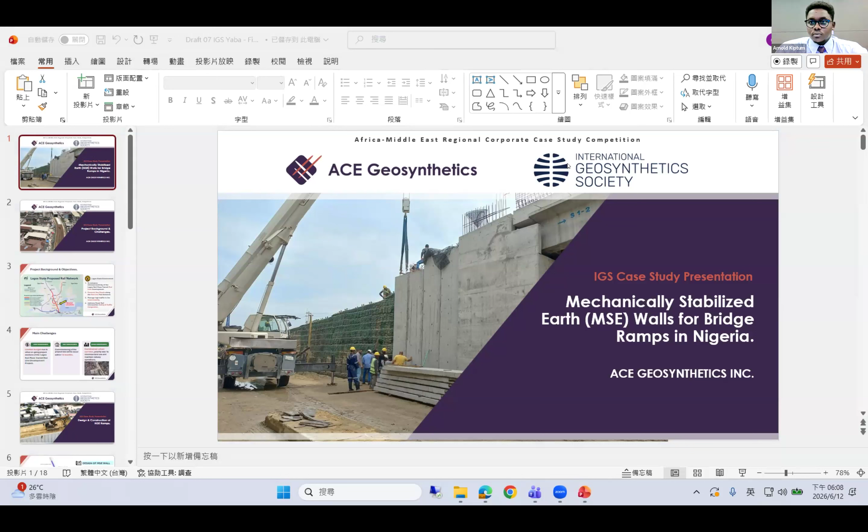Okay, so let's begin with the presentation. To the presenters and to the audience members, thank you so much for making the time to attend this presentation, and the organizers for arranging the presentation. So I'll begin to explain this case study. It was carried out in Lagos, Nigeria, titled 'Mechanically Stabilized Earth Walls for Bridge Ramps in Nigeria.'

So let's begin with the project background, where we see the history of the project as well as the challenges faced in terms of executing the project, as well as the inception phase of the project. As background, this project was initiated by the Lagos State government, mainly to enhance the interconnectivity of the Lagos Rail Mass Transit Red Line development. This project particularly took place in Yaba, as you can see on the screen.

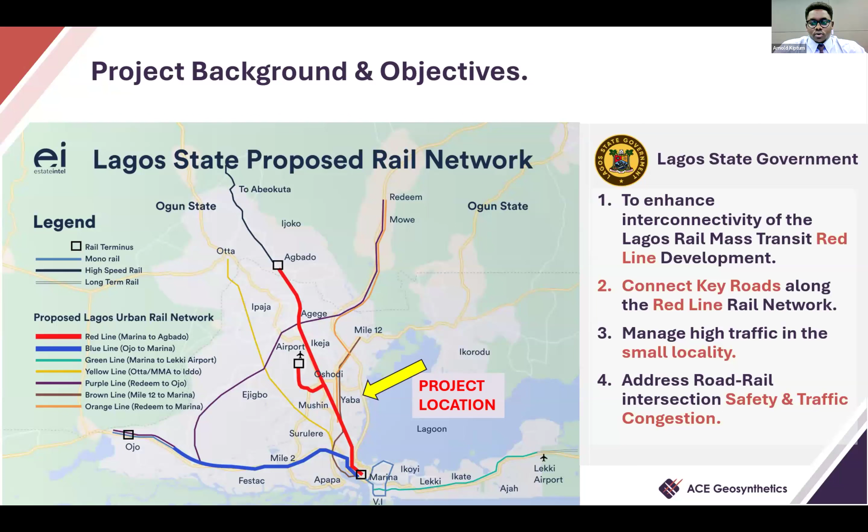The red line you can see in the picture is a railway network around the Lagos area. Other key objectives of this project were mainly to connect the key roads along the red line network, manage high traffic within this location, as well as address the safety and traffic congestion around the points where the rail and road intersect within the project sections.

In terms of the main challenges of the project, we have three main problems: cost constraints, time constraints, as well as space constraints.

There was a limited budget, mainly due to the ongoing project, other sections within the Lagos Rail Mass Transit Red Line Development Project. So a budget had to be contained properly in order to ensure that the overall development was successful. In terms of time constraints, the commissioning of the project was to happen within 10 months due to election cycles, and this commonly affects projects within the region.

And lastly, in terms of the space constraints, there was a huge priority in terms of minimizing the amount of land that was used for the project, as well as to allow for rail operations to continue within the area. As you can see in the picture on the right-hand side, the area is quite dense, and therefore this was one of the constraints that we had for this project.

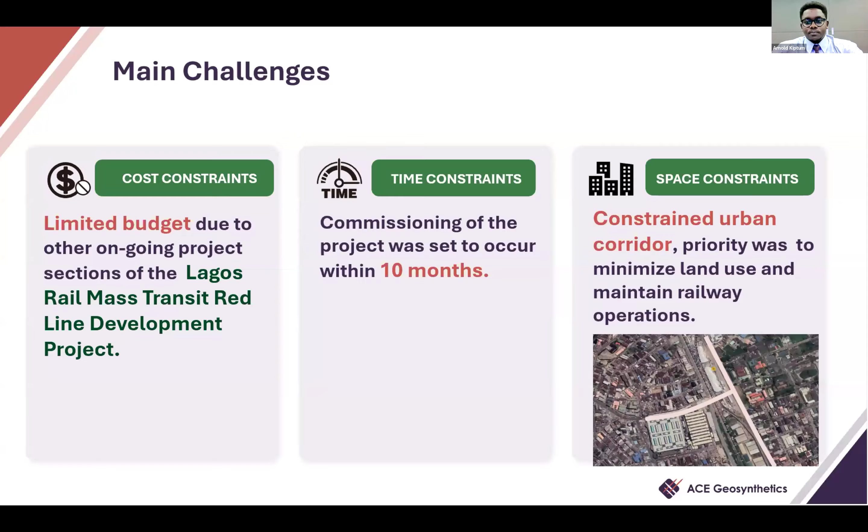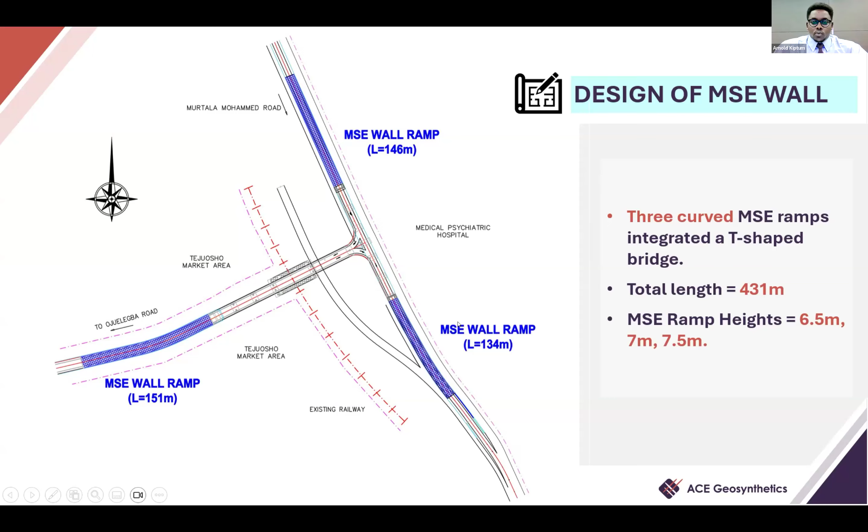So looking at design and construction of the ramps. This picture on the screen shows an overview of the project. Note the railway line in red color passing under the bridge, as well as the three bridge ramps at either side. We do have one, the longest one, spanning 151 meters, connecting the Ojuelegba Road. Then we have two along the Murtala Mohammed Road, which span 146 meters and 134 meters. These bridge ramps went to a maximum height of 7.5 meters, as listed on the screen.

Looking at the section of the wall, it had three main components, namely the MSE wall, a unique anchorage system, as well as the precast full height panels. For the MSE wall, it was chosen mainly to save on the construction footprint due to the limited space. There's also a need to mitigate the differential settlement around the site, since there was some loose soil, and also to allow for lower material costs, since cost was a huge part of the project.

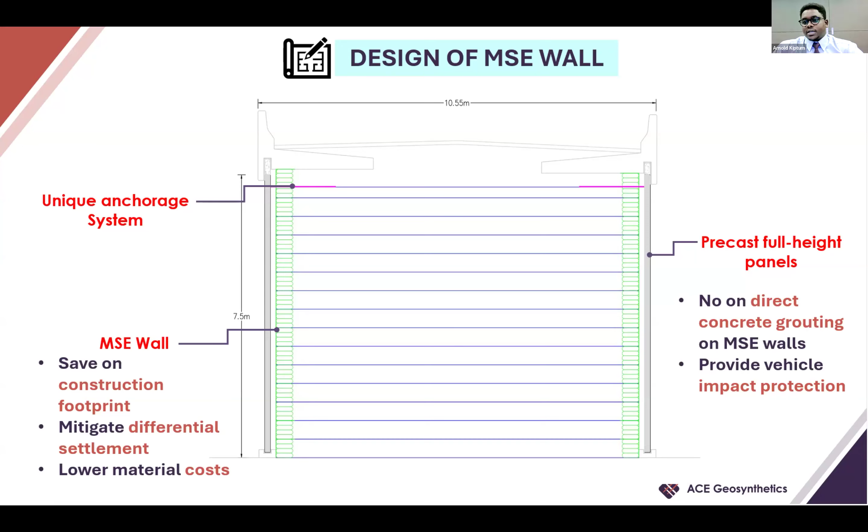Looking at the precast full height panels, this was crucial because through the anchorage system, we were able to ensure that there was no direct concrete grouting into the MSE walls, and also in the event of accidents or incidences within the area, these full height precast panels will be able to allow for impact protection of this structure.

So looking at the benefits and contributions of geosynthetic materials in this project, we have quite a few. Starting with environmental conditions, locally available materials were used for this project. For this case in Lagos, it's sand, and therefore this material is easily obtainable within the site, and this made for a good use for the backfill. Also, since thinner panels were used for the facing and only at the coping section, the use of concrete was really reduced, and this helped also in the cost aspect.

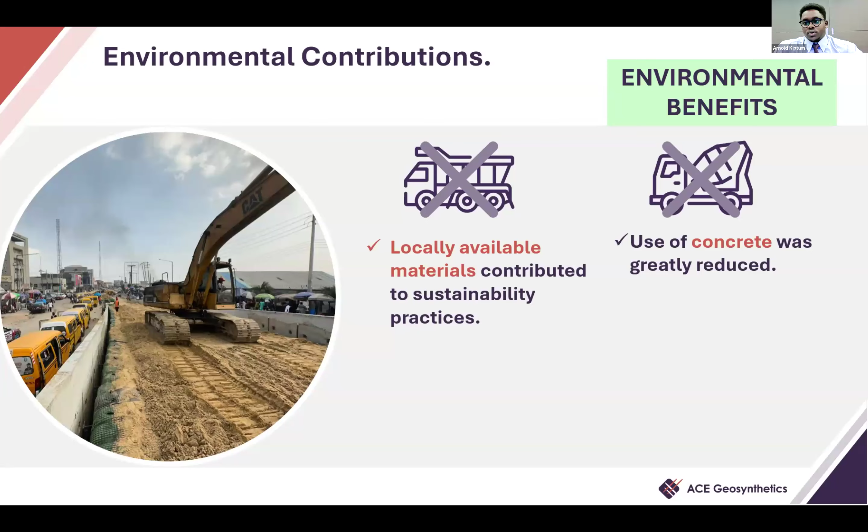Looking at the environmental contributions of the project, if we compare in Nigeria the use of MSE walls, commonly in Lagos, Nigeria, RC bridge pier ramps are the most widely implemented structure for quite a long time. Therefore, we were able to compare that by using the precast facing ramps, we were able to provide carbon emission savings of 74% compared to these typically used RC bridge pier ramps.

The graph on your left also shows the percentage reduction for the RC bridge pier ramps, the cantilever retaining wall that we also thought would be an option, as well as the CIP facing and the precast facing ramp, only producing emissions of 406 tons of carbon emission. For this analysis, the main criteria was mainly around material production and transportation, as shown on the screen.

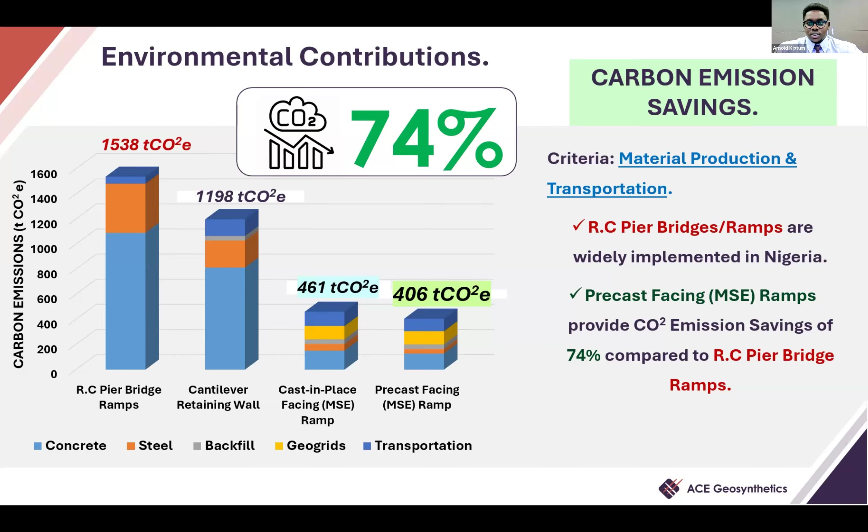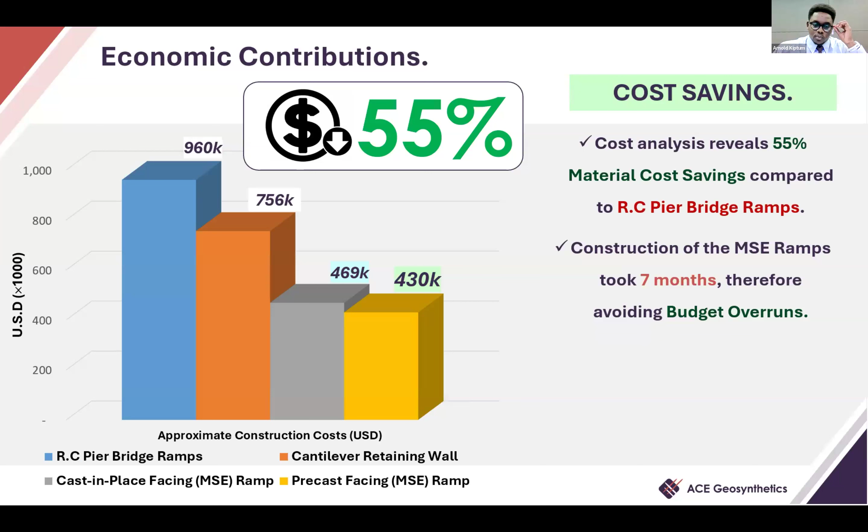Also, in terms of other economic contributions, because of less concrete use and other materials as well, we were able to estimate material savings of 55% as compared to RC bridge pier ramps. And because the project only took 7 months, this provided also additional cost savings by avoiding project overruns that are common with most projects within the region.

In terms of construction efficiency, the MSE ramps also allowed for construction to take place in a limited amount of space. In the previous slides, we were able to see how dense the area was. Also, when you look at maintenance, because MSE structures also allow for low intensity and low frequency of maintenance, this helps to reduce the long-term costs of spending in maintaining infrastructure facilities, particularly in the public sector, or public use.

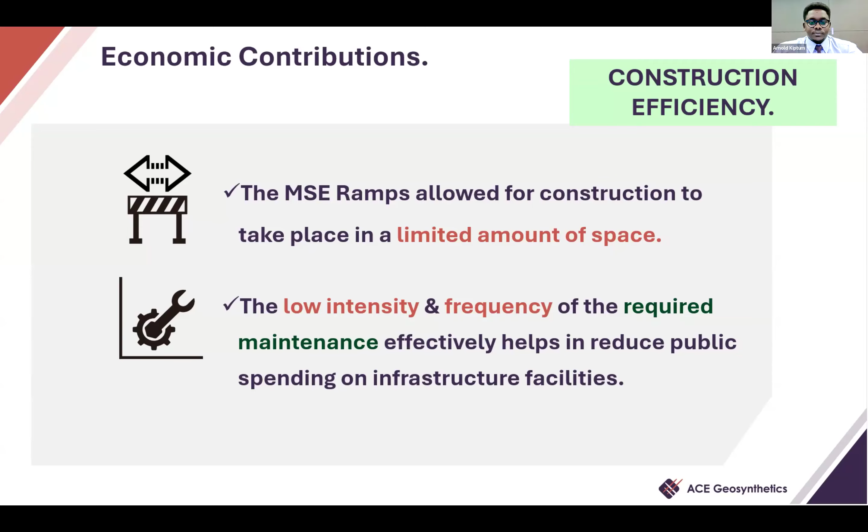So as we wind down to the conclusion, we have a video summary of the project to help you appreciate the construction phase of the project, as well as understand the impact that this project was able to make to the society within the area. So hope you enjoy.

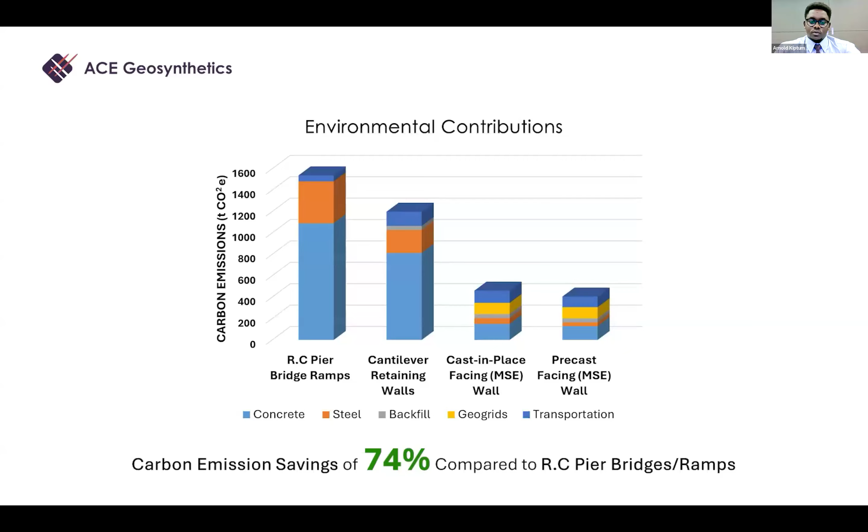So other than that, thank you to the organizers and to the audience members for having listened to this presentation. So thank you, and I would like to welcome any questions or comments from the panelists. Thank you so much.

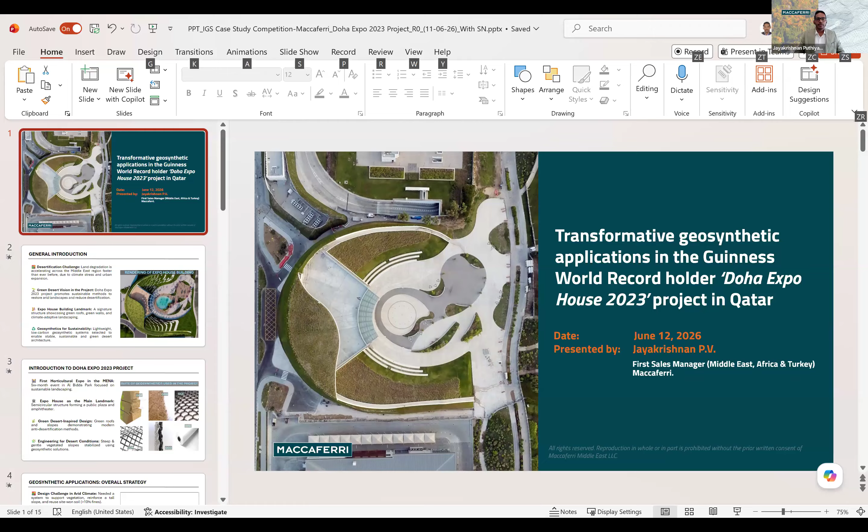Good morning, good afternoon, and good evening to all of you tuning in from different parts of the world. Ladies and gentlemen, it is my pleasure to present the transformative geosynthetic applications in the Guinness World Record Holder Doha Expo 2023 project in Qatar. When I say this, I truly mean the way in which geosynthetic solutions played a transformative role in delivering the project's green desert vision.

Let me take you through the general background of the challenges associated with projects like this in the Middle East, and how geosynthetics can contribute to solving them to some extent. The Middle East faces the severest challenge of desertification and land degradation due to factors such as climate change, fast development, and a fragile ecosystem already existing.

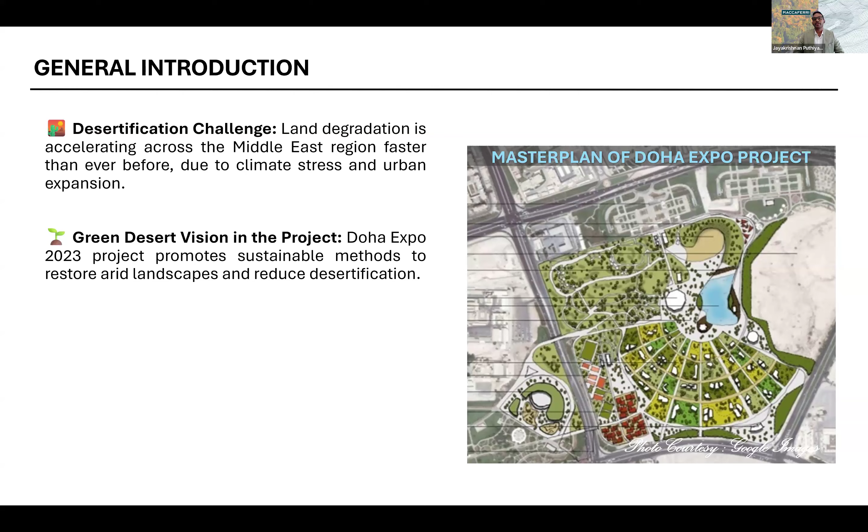The Doha Expo 2023 project, as you can see in the master plan, embraced the theme Green Desert, Better Environment, proving that desert landscapes can be reshaped into sustainable green spaces. The Expo House building is a landmark in the project, showcasing how architecture, landscaping, and sustainability can integrate to perform in harsh desert conditions, highlighted by its green roof and vegetated slopes.

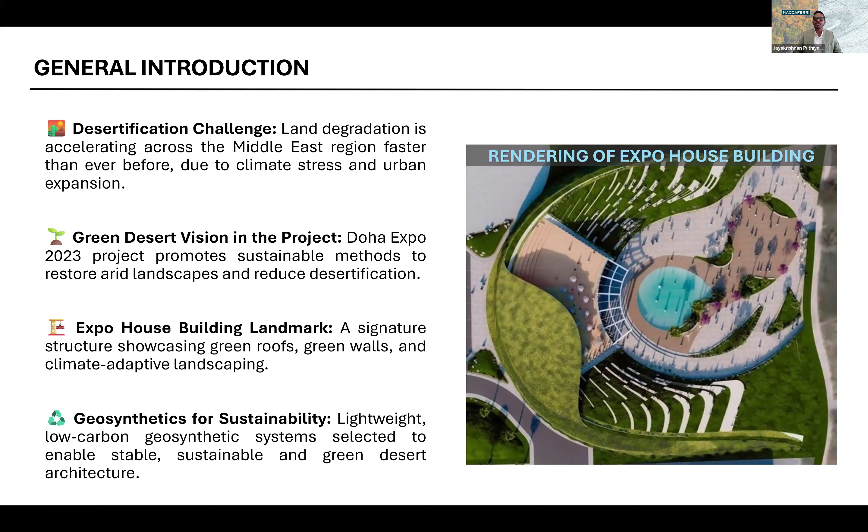Now, what can be the role of geosynthetics in this? They can be used for the creation of steep vegetated slopes, efficient water management, and reduced material use to support sustainable development in arid regions.

Coming to the Doha Expo project itself: this was the first ever horticultural expo in the whole Middle East and North Africa region, and it ran for 6 months in Al Bidda Park in Qatar, all centered on sustainable landscaping in arid climates. The event projected the Expo House building as the main landmark.

The structure has a semicircular shape, opening into a plaza and an amphitheater, fitting perfectly with the green desert theme. Here is the completed project. It uses a green roof and landscaped slopes to show how modern planting systems can actually work in desert conditions—practical, but also a live demonstration of how this can be made possible in arid climate. You can see a striking similarity between the completed structure and the previously shown rendering.

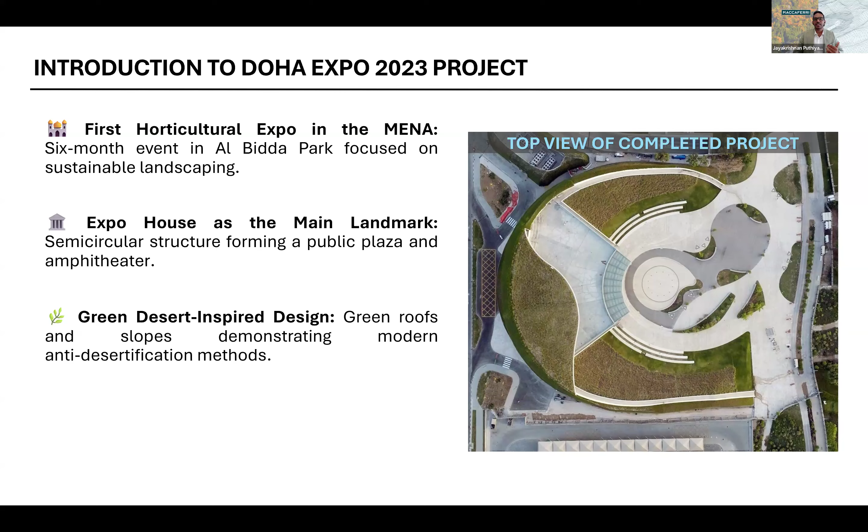Now, the role of geosynthetics: making steep vegetated slopes in Doha is not simple. We need proper soil retention, drainage, and plantation support, and that's exactly where geosynthetics made the architect's idea buildable. Let's look at how geosynthetics were actually used in the project.

Here you can see a cross-section of the earth mound. We have to support vegetation in a very dry climate, reinforce a tall slope, and still reuse the site soil, which is poorly graded dune sand. So the system needed to be strong and environmentally efficient.

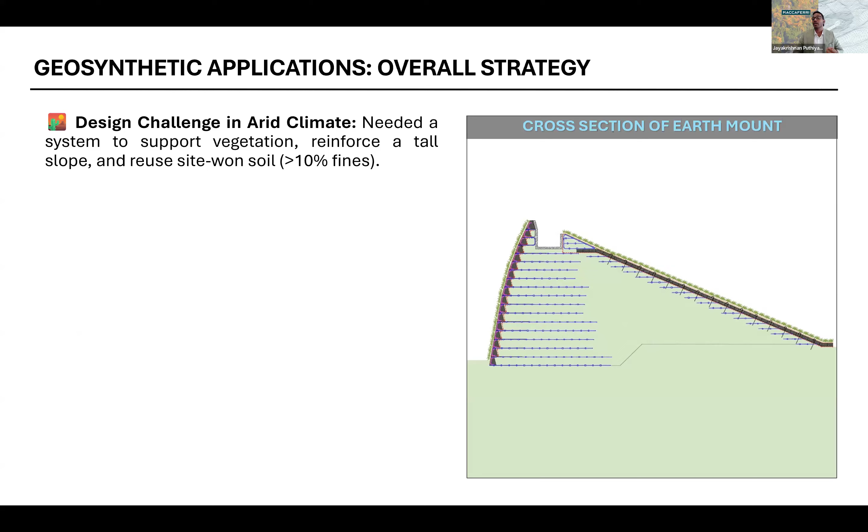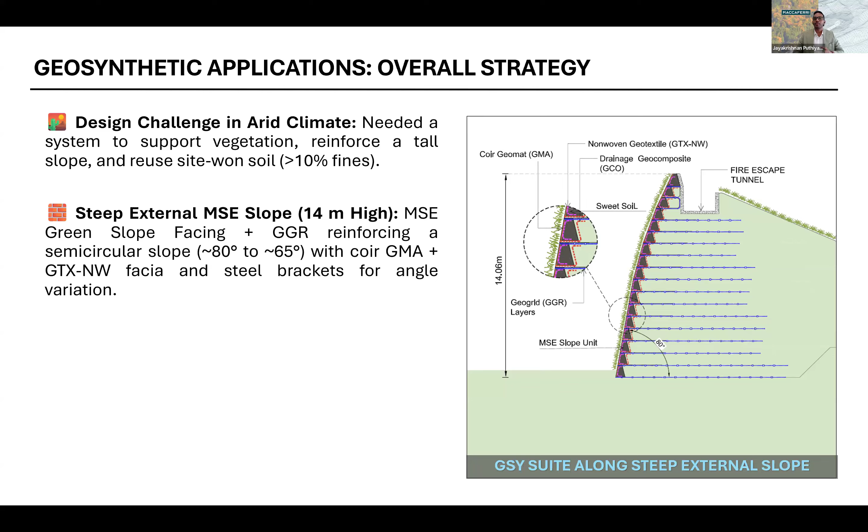The steep external reinforced soil slopes went up to 14 meters in height. We used a combination of MSE green slopes, geogrids, geomats, coir geomat, non-woven geotextile, and steel brackets to manage the changing angles. The inner gentle slope angle varied from 23 to 35 degrees.

Here the visitors are expected to walk, so we used shorter geogrids and geocells for stabilization and soil confinement with the help of J-hooks, and a coir geomat layer was provided all over the top for erosion control.

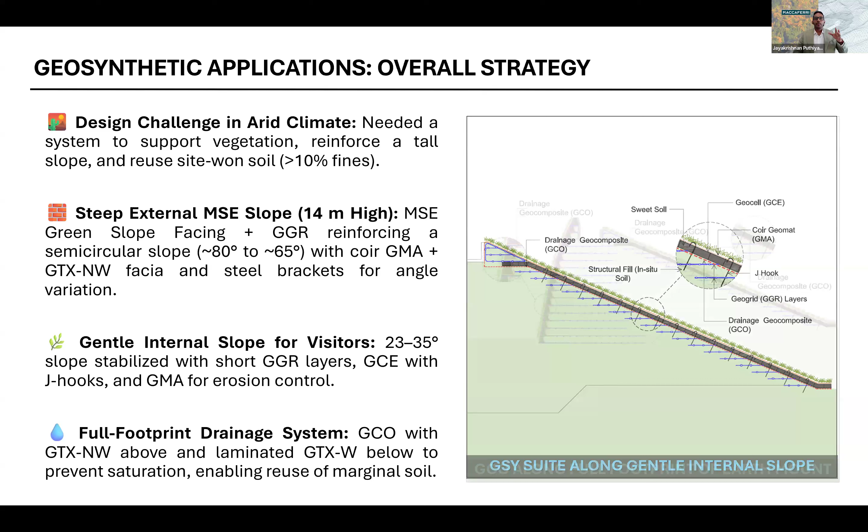Below the entire footprint of the green mound, a layer of drainage geocomposite was used with a geotextile on top and a waterproofing membrane below, which allows recirculation of excess irrigation water while preventing any ingress of water into the structural soil.

This is how we were able to use the dune sand as backfill soil rather than importing engineered fill, because dune sand looks compacted, but when it comes into contact with water it further settles and can cause bulging of the structure. As a result, all the geosynthetics worked together to deliver the geometry, stability, and sustainability the project needed.

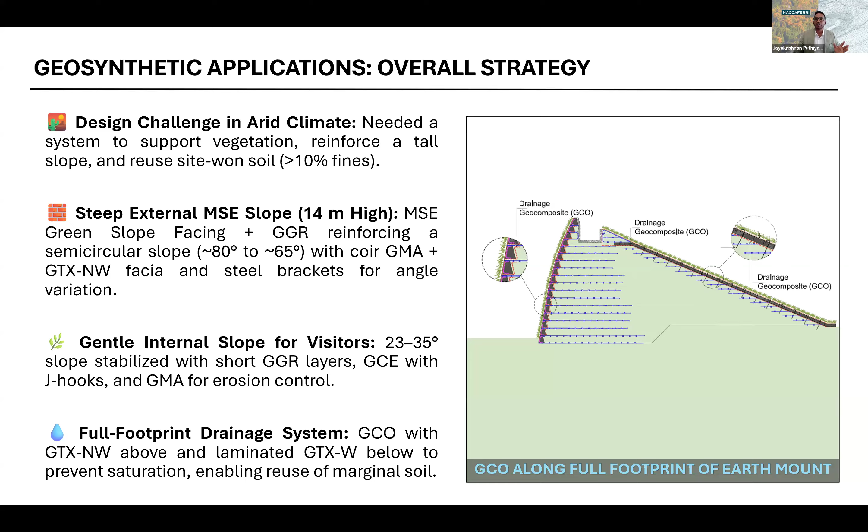Here is a quick summary of the geosynthetics used in the project: geomats, non-woven geotextiles, drainage geocomposites, geocells, and MSE green slopes, serving the functions of erosion control, separation and filtration, drainage and waterproofing, retention of cover soil, and soil reinforcement for steep slopes.

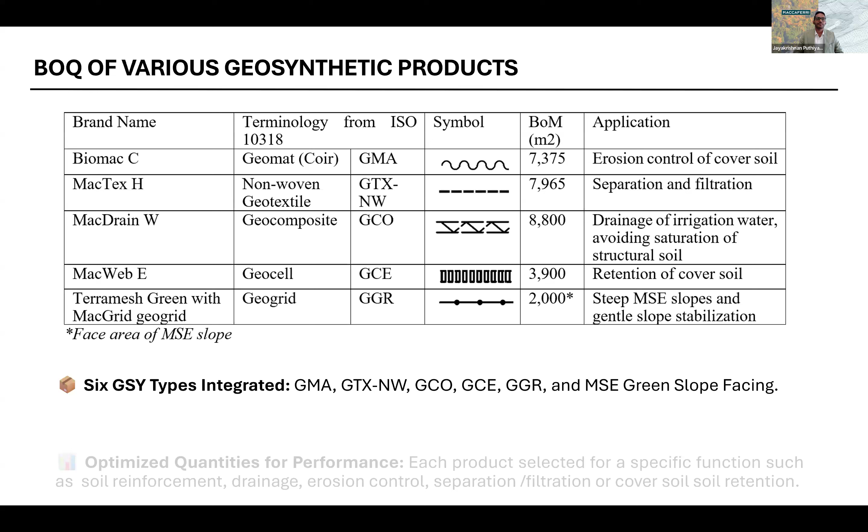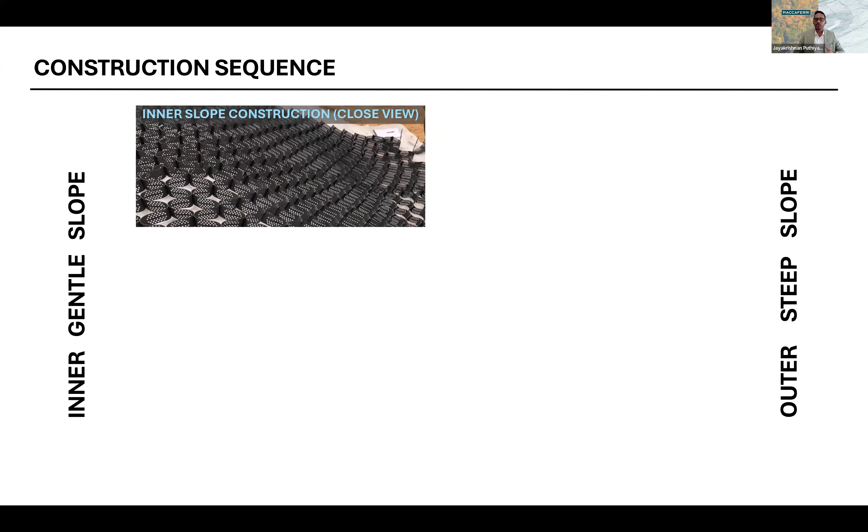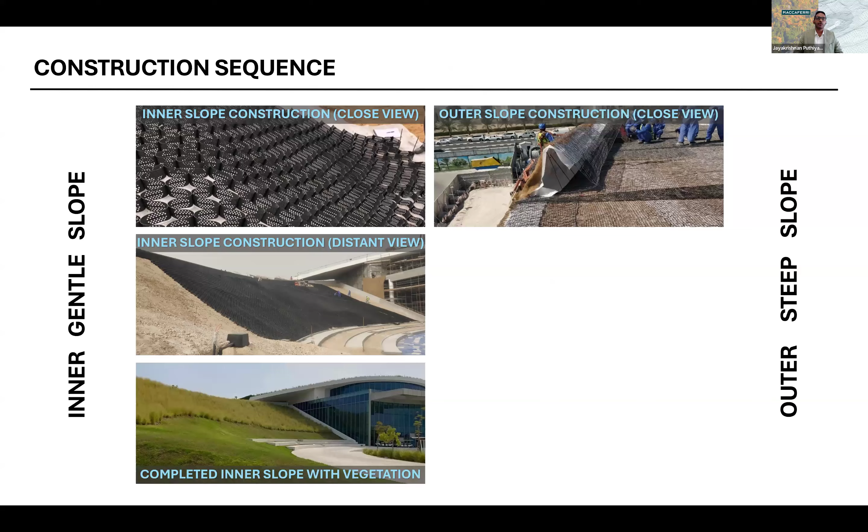Let's have a look at the construction sequence, which is bifurcated into the inner gentle slope and outer steep slope. Here you can see the inner gentle slope. During construction, the geocell was laid, with a close view and a distant view, and here is the completed inner gentle slope with vegetation grown. Here is a close view of the outer steep slope.

During construction, a distant view. And here is the outer steep slope after construction with vegetation grown.

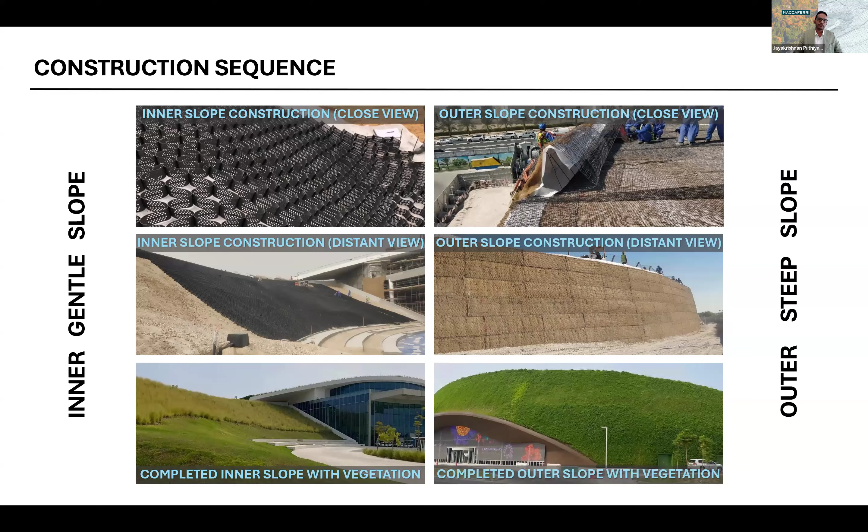This is another distant view from the roadside after complete greenery has happened. And this is another view from the inside, from the amphitheater side, the beautiful Expo House built completed with greeneries.

Now let me walk you through how the project was recognized and the broader impacts we have created. The project was successfully completed in 2023, delivered exactly as planned for the international exhibition, meeting all design, functional, and sustainability expectations. The Expo House quickly became the most photographed and most visited attraction of the 6-month-long horticultural exposition, giving the project exceptional public visibility and recognition.

And here comes the most important thing: the end client, Ashgal, received an official Guinness World title for the largest green roof, having an area of 4,031 square meters, in September 2023, giving the project global recognition and credibility. Needless to say, the geosynthetic-based solutions also contributed, providing stability, drainage efficiency, and vegetation support needed for the green slopes to perform in harsh desert conditions.

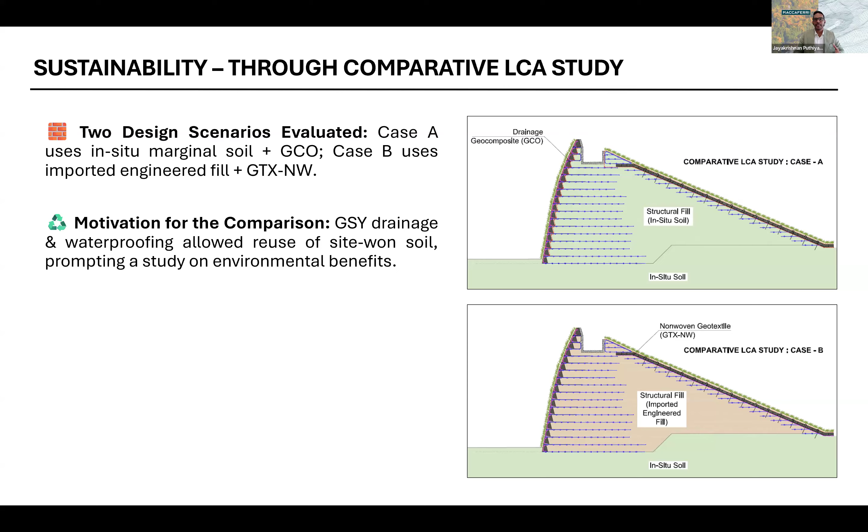Let me take you through the sustainability comparative studies. We studied 2 scenarios, because at one point it was really required for imported fill, and that apprehension of the project stakeholders was solved by the provision of a drainage geocomposite all around. So here we are comparing 2 scenarios: case A with drainage geocomposite and site-won dune sand as the structural fill, and case B with a non-woven geotextile separation layer and imported engineered fill.

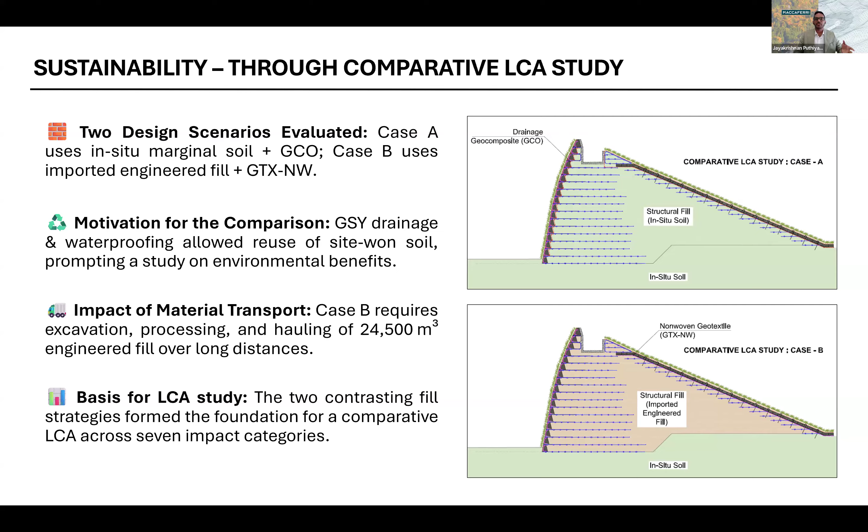In case B, about 24,500 meter cube of engineered fill would need to be mined, processed, and hauled, and that transport alone drives significant emissions and energy use. This formed the basis of the comparative life cycle assessment, comparing these 2 contrasting approaches: reuse versus import. You can see the results with reference to the 7 most important environmental impact categories.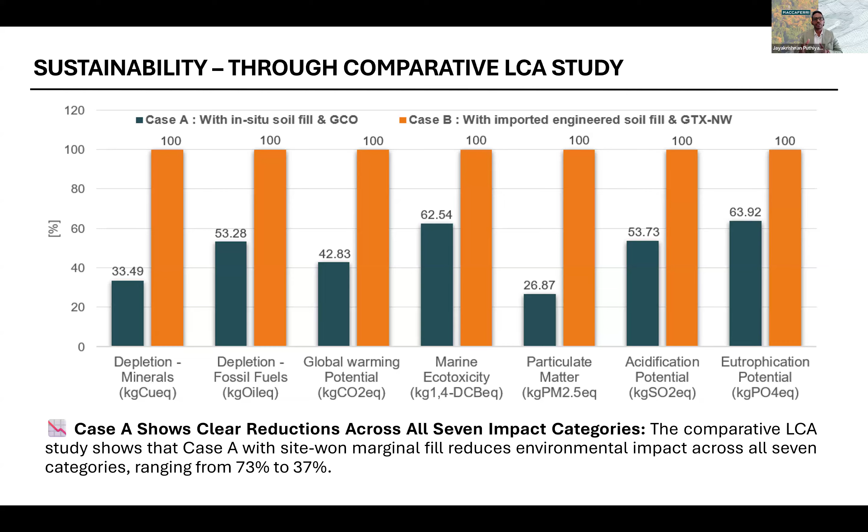The results are very clear. Case A, the solution using site-won soil with the drainage geocomposite, performs better in every single impact category, whether it is global warming potential, fossil fuel depletion, particulate matter emission, or ecotoxicity. Case A consistently shows lower environmental impact. So the geosynthetic-enabled reuse of soil directly translates into measurable sustainability gains in the range of 37 to 73%, as you can see from the normalized representation in the graph here.

Sustainability doesn't stop here. Let's see how the Expo House stands out as a project sustainability flagship. The Sustainability Progress Report from GORD, which means Gulf Organization for Research and Development, presented the Expo House as the benchmark for sustainable design across the whole 1.7 million square meter Expo site. In the report, 4 pages are dedicated to the Expo House, showing it is featured as the most prominent sustainability enabler in the whole project.

Expo House is the only structure in the whole project that achieved GSAS's 4-star rating, which is why it is featured so prominently in the sustainability documentation. GSAS stands for Global Sustainability Assessment System. The building has 30% higher energy efficiency than the usual ASHRAE standards, which stands for American Society for Heating, Refrigeration, and Air Conditioning Engineers. The typical ASHRAE standard building efficiency here is exceeded by 30%.

And thanks to the contribution also from the geosynthetics, that reduce the heat gain and cooling loads from the green roofs and green slopes, improving the thermal comfort and reducing the HVAC, the heating, ventilation, and air conditioning demands, improving the overall sustainability performance in the project.

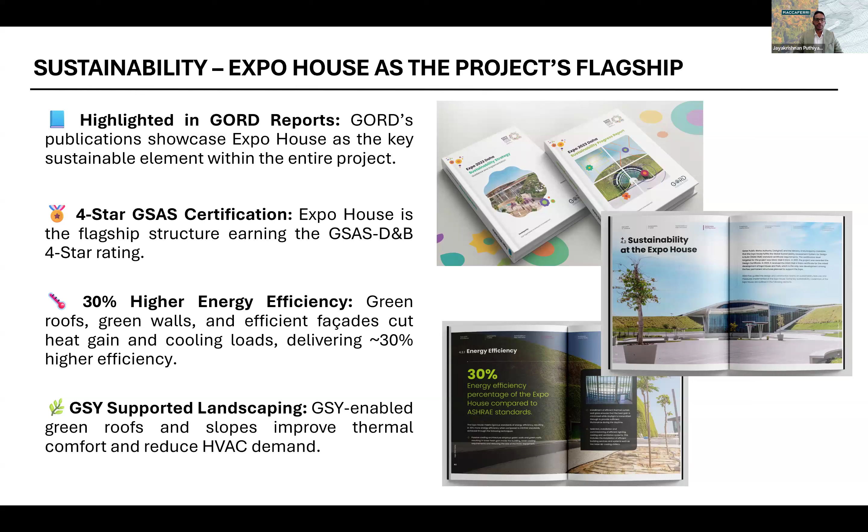I would like to share my final reflections on the project with respect to the various scoring criteria in the competition. First, the relative importance of the geosynthetics solution in the project.

You have already seen how steep vegetated slopes were enabled in the project, and it's the most important aspect of the geosynthetic solution, especially considering the arid region of the project. Without reinforcement and drainage layers, steep vegetated slopes simply wouldn't have worked in Qatar's desert climate with conventional construction materials.

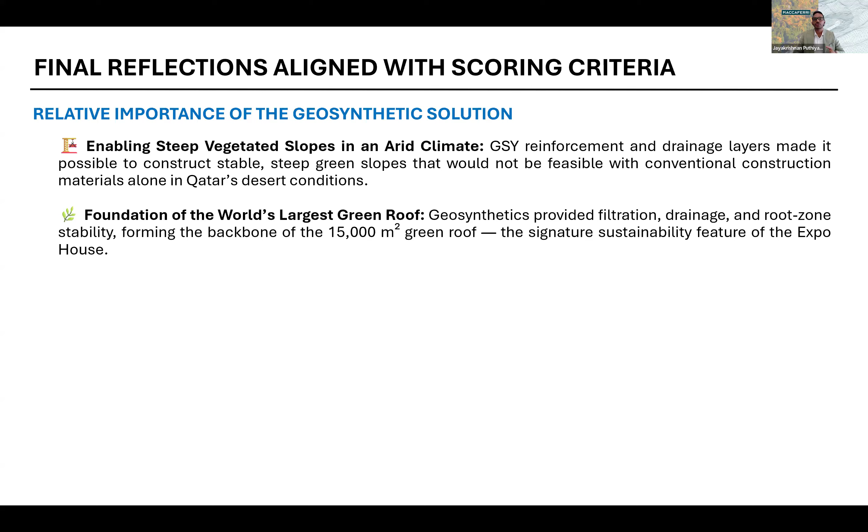Another aspect is that the geosynthetic systems here form the foundation of the world's largest green roof, performing functions such as filtration, drainage, and root zone stability. This overall contributes to the structural and drainage stability of the support system.

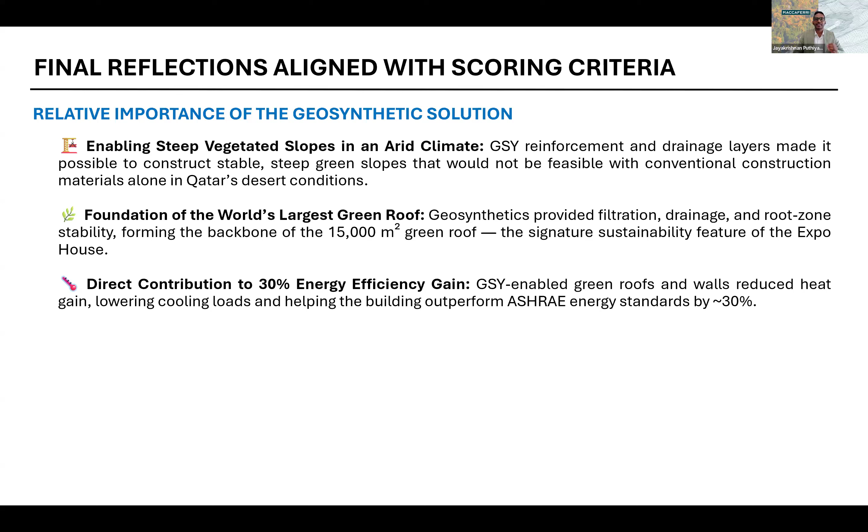Also, the geosynthetics enabled the green roofs and walls to actively contribute to a 30% energy efficiency gain by reducing heat gain and cooling loads, directly supporting energy efficiency compared to typical ASHRAE standards.

Now, the innovative practices adopted in the project. The sustainable use of marginal desert soil, or dune sand, was a key innovation, overlooking the FHWA requirements for structural soil. This was made possible mainly through the effective drainage and waterproofing offered by the drainage geocomposite layer.

Efficient management for irrigated landscape was another innovative practice, providing a geocomposite layer around the entire footprint as a waterproofing and drainage layer. It controlled moisture retention and quick removal of excess water, which were critical in Doha's high evaporation climate to keep the vegetation healthy and performing in the long term.

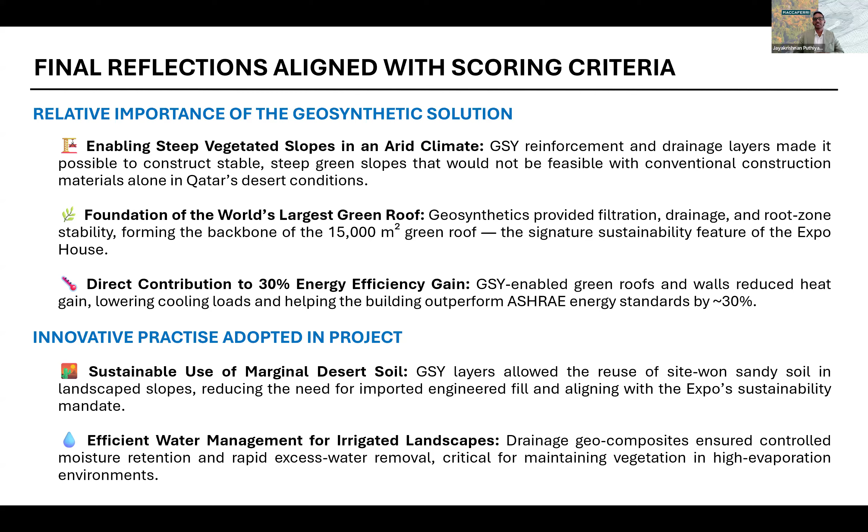Next is environmental and social benefits, briefed in this slide with reference to the various United Nations Sustainable Development Goals, in terms of how they are contributed directly or indirectly.

The use of local materials, mainly the marginal dune sand, EPD certified geosynthetic elements, and the reduced earthwork contributed to SDGs 9, 12, and 13.

Avoiding the use of cement or any cement-related products and the use of modular geosynthetics contributed to SDGs 12 and 13. As we saw earlier from the comparative LCA study results, the reduction in environmental impacts contributed to SDGs 12, 13, and 14, because the reductions are in the range of 73 to 37%.

So that's about the environmental benefits. Coming to the social benefits, hosting tours and workshops at the Expo House created public awareness of sustainable design, which indirectly contributed to SDG number 11.

Also, upskilling of the local team in green roof construction as well as geosynthetic installation contributed to SDG number 8.

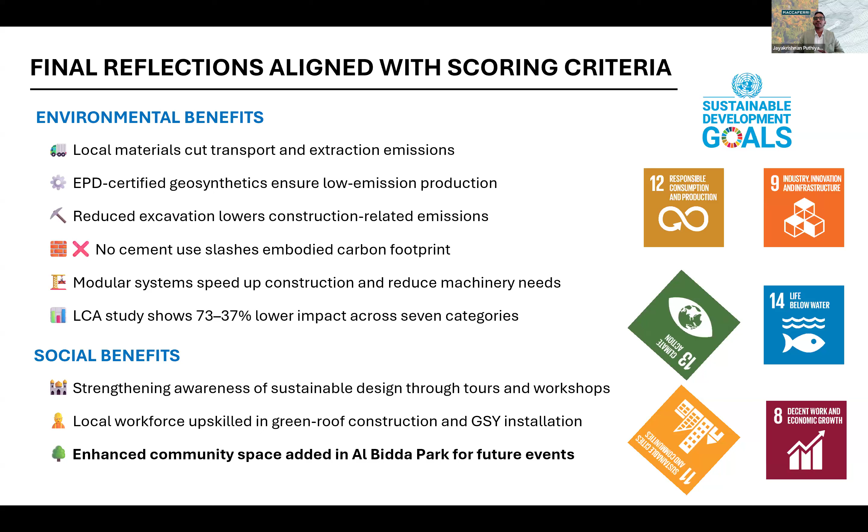Finally, by adding a new community space in Al Bidda Park, a permanent community space for future events, contributed to SDG 11 and 13 by strengthening sustainable, climate-friendly public areas.

Concluding remarks. As a conclusion, I hope the next points presented shall capture the key takeaways from the Expo House project.

The Expo House 2023 was established as a landmark in the arid region, changing an arid site into a long-term sustainability-focused public venue for future events.

The green roof in the project acts as a living showcase, a live demonstration of sustainable design and urban greening, educating visitors to Al Bidda Park.

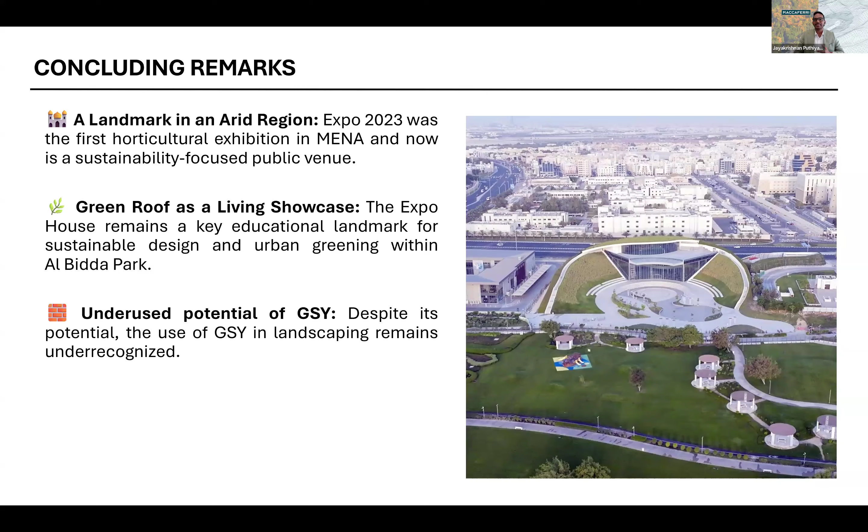However, the project also highlighted how much untapped potential geosynthetics still has in landscaping, especially for complex geometries and green infrastructure works. The Expo House 2023 clearly shows how sustainable geosynthetic solutions can deliver high-profile, technically demanding landscaping and architectural outcomes.

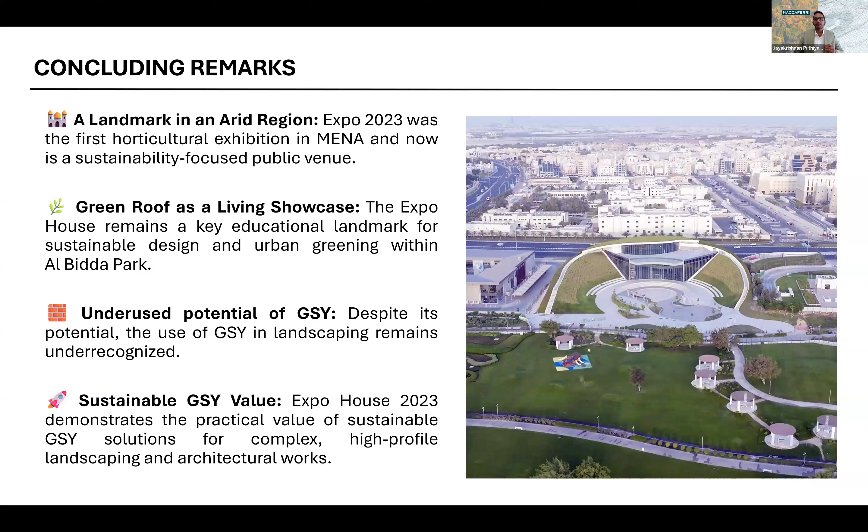So, ladies and gentlemen, that brings us to the end of the presentation. Thank you so much for your attention, and I am ready to take any questions that you may have.

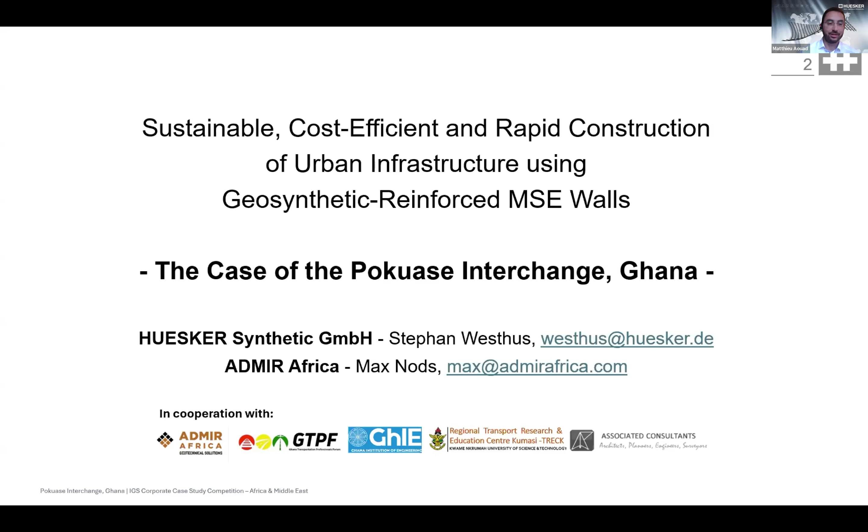Good afternoon everyone, my name is Mathieu Awad, area manager of the Middle East at HUESKER Synthetic, and I'm very happy to be here today to present the case study of the Pokuase interchange in Ghana. The title of this case study is Sustainable, Cost-Efficient, and Rapid Construction of Urban Infrastructure Using Geosynthetic Reinforced MSE Walls. The project was carried out in cooperation with several local and international partners and stakeholders, including Admir Africa, the consultant, the contractor, and the local stakeholders. I would also like to welcome Mr. Max Nods, present with us as well, as project partner and manager.

My presentation will be structured in 10 small parts. First, I will start by introducing the project and the challenges of the project, as well as the limitations of the conventional systems. Then I will move on to introduce the geosynthetic solution, the MSE wall technology, focusing on sustainability, performance, economic efficiency, and constructability. Then I will move into the impact and relevance of the project from an innovation and global relevance point of view, finally closing with the relevance and importance.

The Pokuase interchange is located in the Greater Accra region, one of the fastest growing urban areas in West Africa. Accra has very high pressure on its road infrastructure, and currently the public railway system is also limited, as well as the organized bus system. So a lot of the daily commute is done using taxis, cars, and small vans, which causes congestion, a major challenge for both mobility and economic activity.

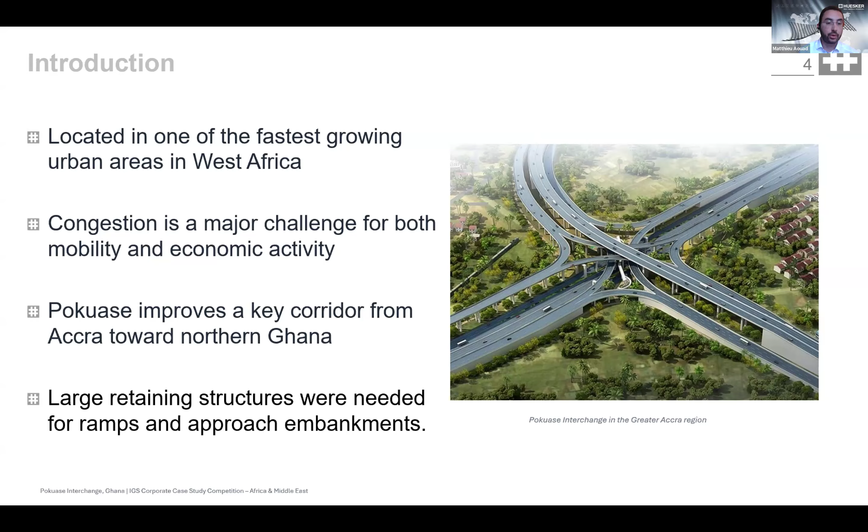To solve this issue, the Pokuase interchange was introduced as part of an important transport corridor connecting several major roads and highways. Due to the major complexity of the geometry, it also contains large retaining structures for the ramps and approach embankments. The Pokuase interchange was one of the first fourth-tier interchanges with multiple bridge levels and connecting roads in West Africa. At the time of building, it was the largest interchange in West Africa.

There were also several key challenges during the project. First, the subsoil in the area is weak and compressible, so the solution needed a settlement tolerant solution for the retaining system. Second, the construction had to be carried out while keeping traffic moving as much as possible. Third, the project is in an urban area with limited footprint.

There was also a budget constraint for the project, so the solution for the retaining walls needed to also be cost efficient. And last but not least was the seismic condition, because of a geological fault zone.

Regarding the conventional retaining systems that were considered, they included the cantilever wall, the gravity wall, and the deck on pile system. However, these systems had clear disadvantages. First, they would require more concrete and steel, meaning higher embodied carbon. As already discussed, we had weak soil as the subsoil, which would also mean deeper foundations and higher cost.

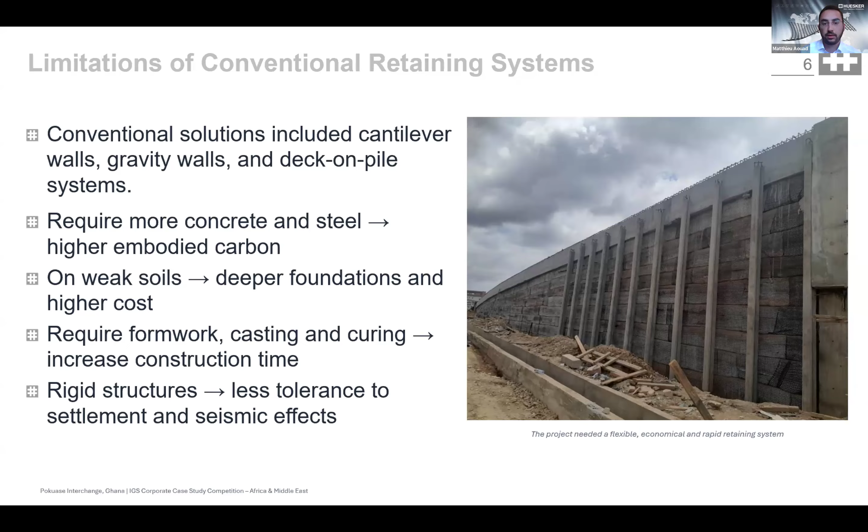So for the Pokuase project, we needed a retaining system that is flexible, faster to build, and better suited to local ground and site conditions. Therefore, the solution of using geosynthetic reinforced MSE walls was chosen as a practical and innovative solution.

MSE walls combine compacted soil and geogrid reinforcement into a stable composite structure. In the whole project, more than 20 to 25 MSE structures were built with heights up to approximately 12 meters, and high performance geogrids were tailored to site requirements. The system was designed following Eurocode 7 and British Standard 8006, and the internal, external, and global seismic stability were also verified.

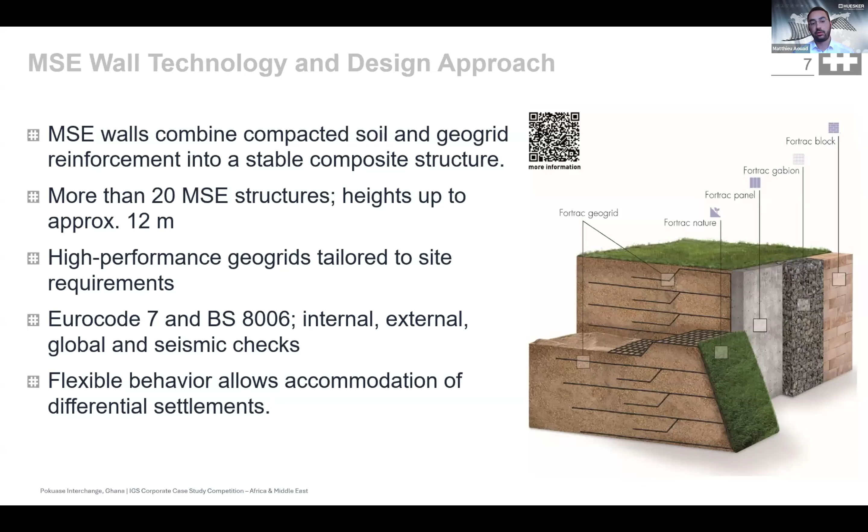An important technical advantage of this solution was that it was a flexible solution, allowing it to accommodate differential settlement more than a rigid concrete wall.

Now to discuss the sustainability performance of the solution. This sustainability came from several sources. First, the MSE solution reduced the lower embodied carbon. This was achieved due to the reduction in concrete and steel, which are main components of conventional retaining systems, and this also meant lower overall material use was achieved by using MSE walls.

Second, the system allowed the use of locally available sand. The original design was made using imported backfill with a frictional angle of 35 degrees. However, the contractor wanted to use the available local fill, so laboratory testing was done, and then we redid the design in order to be able to use the local fill for the backfill.

This achieved two important benefits. First, it reduced the pressure on natural resources, and it also reduced the need of transporting large volumes of quality fill from far places, and of course it also reduced the total cost of the project.

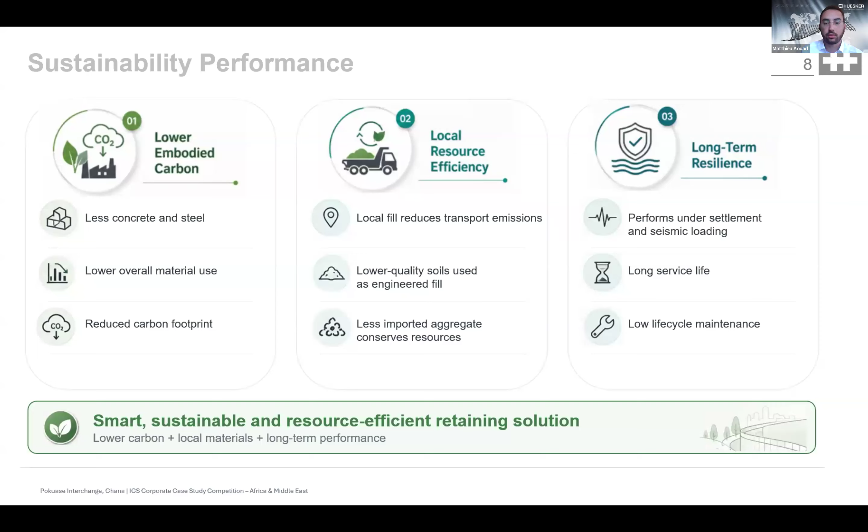Talking about sustainability, we also have long-term resilience. This solution performs well under seismic loading, and it has a long service life, also meaning low life cycle maintenance.

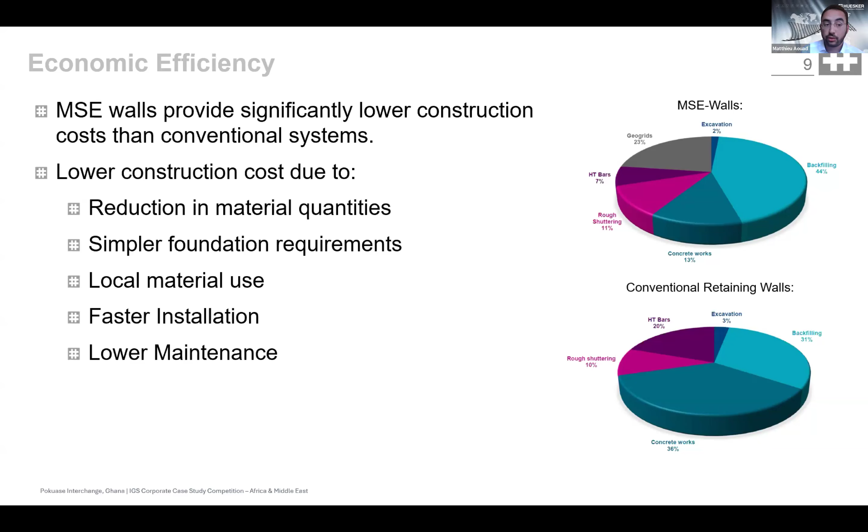Regarding economic efficiency, the MSE wall provides lower construction cost, as we can see in the graph on the right, with the cost being typically around 70 to 75% of the cost for a conventional concrete retaining wall. This lower construction cost is due to the reduction in material quantities, simpler foundation requirements, local material use, faster installation, and lower maintenance.

Yeah, this project was definitely innovative because it introduced the MSE wall design in a large scale in Ghana. There had been previously MSE walls in Accra, but this is a first major application in such a big scale project. It was done in cooperation with several stakeholders, and the training also was very important and practical. It was not only classroom training, it was on-site training, how to place the geogrid, how to backfill near the wall.

And this is one of the very important takeaway message and goal of this project, because this knowledge transfer can now be used for other projects in Ghana and West Africa. It also was awarded the FIDIC recognition for engineering excellence due to innovation, and the MSE walls were definitely part of this innovation.

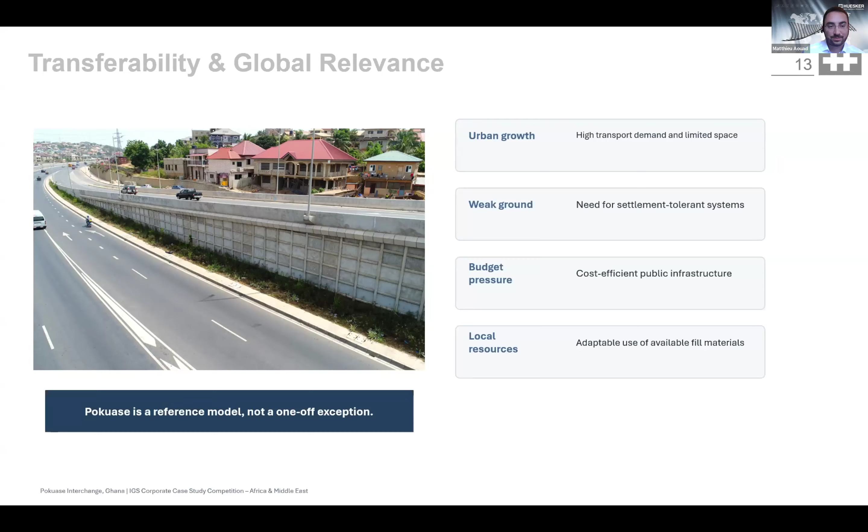To conclude, the Pokuase interchange clearly demonstrates the benefits of geosynthetic reinforced MSE walls. The system successfully addressed the main project challenges, from weak soils to settlement sensitivity, to limited urban space, traffic disruption, and budget pressure.

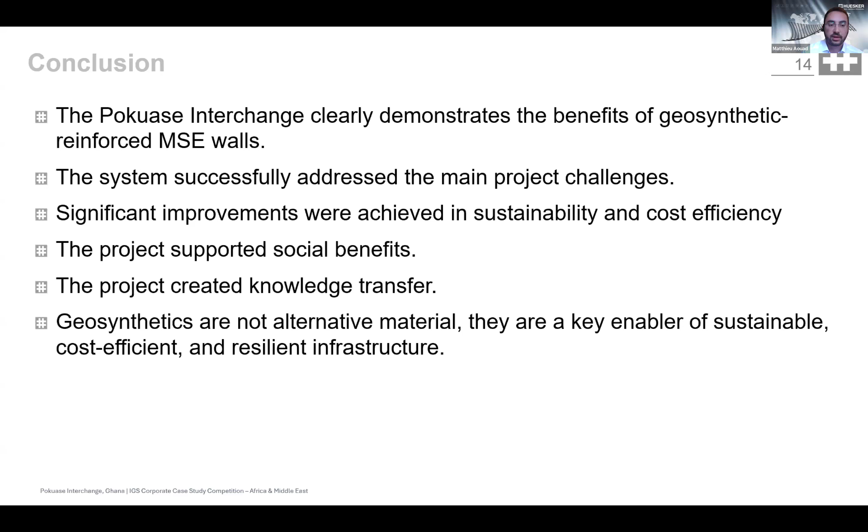It also supported the social local community, as well as it created a knowledge transfer for the whole region of Ghana and West Africa. So geosynthetics are not an alternative material, they are a key enabler of sustainable, cost-efficient, and resilient infrastructure. Thank you for your attention.

Thank you very much, Matthew. Very good presentation. Any question? No question, even not from the attendants. I have one question.

Angelo: Under the social point of view, what is the most important and effective effect of your intervention, you think?

Yeah. So first of all, I would say that the interchange is located in an area that already contains, it's close to trading and shops. It also close to buildings, residential buildings. So it was very important to have a small footprint for the whole project.

And secondly, the fast construction. So to have being able to do the whole construction while not disturbing the traffic and not closing, while not disturbing the traffic, was also very important for the daily commute of the people passing into this region.

No, I have a presentation. Can you see it? Able to see? Perfect, go on. So welcome everyone. Today I am going to present the case study on ground improvement for container yard and storage warehouse at Nacala Port, Mozambique.

Just to give a brief about the project location: this project was executed at Nacala Port in Mozambique, one of the deepest natural ports on the East African coast, and a strategically very important logistics hub for regional and international trade. With increasing cargo volumes and growing port activities, there was a need to develop a new container yard and storage warehouse facility capable of supporting intensive logistics operations. So it's a strategic gateway for international trade, and expansion is required to accommodate the increased cargo volumes.

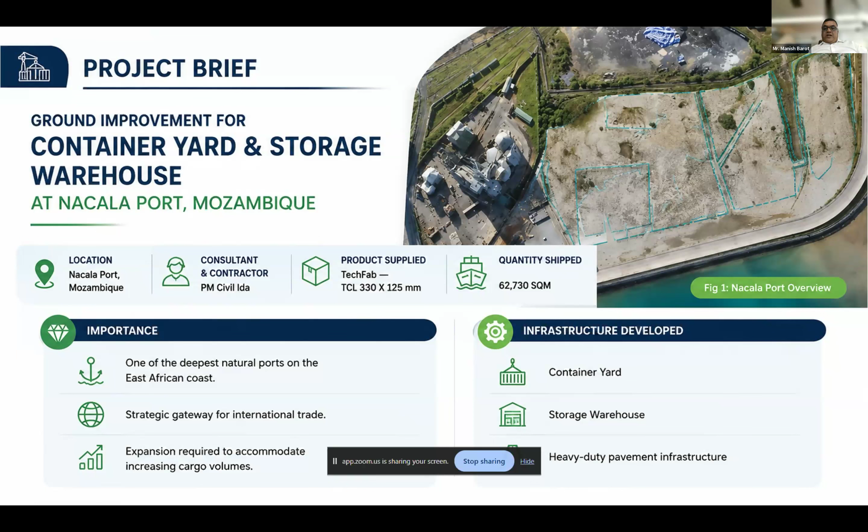The infrastructure to be developed on that site includes a container yard, storage warehouses, and heavy duty pavement infrastructure. The demands of the project include container stacking loads, reach stackers, movement of heavy forklifts, heavy truck movements, and continuous operational traffic. The objectives are high bearing capacity, long-term serviceability, minimal maintenance, and controlling settlement, as the site is near the seashore.

So you can say the marine clay poses a very big problem. Geologically, the characteristics of the project site soil are loose to medium dense reclamation sand, underlying soft clay deposits. Groundwater is also shallow, with low shear strength soil and moderate to high compressibility. You can see the site photograph.

We have done a number of trial pits, and we come to understand that the soil is very soft, the groundwater table is very high, and we have to take care of the heavy loading, then high settlement. We have to control the settlement, as well as reduce foundation instability, and deformation also has to be reduced.

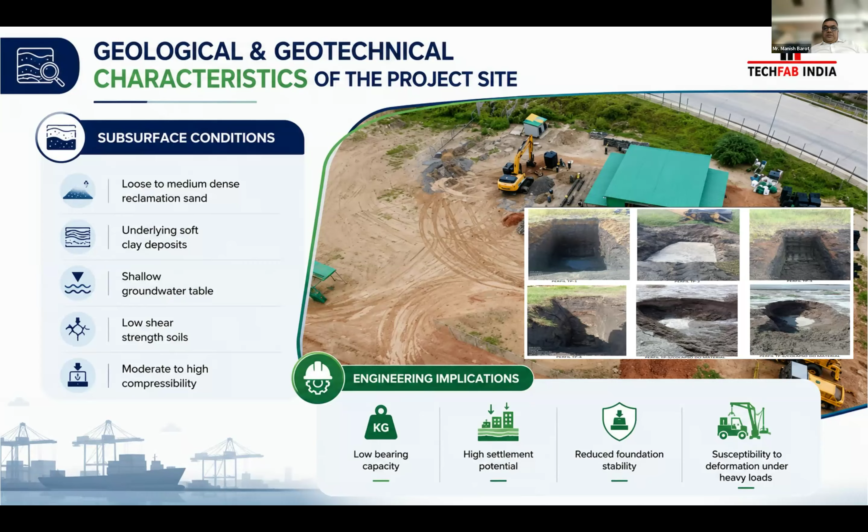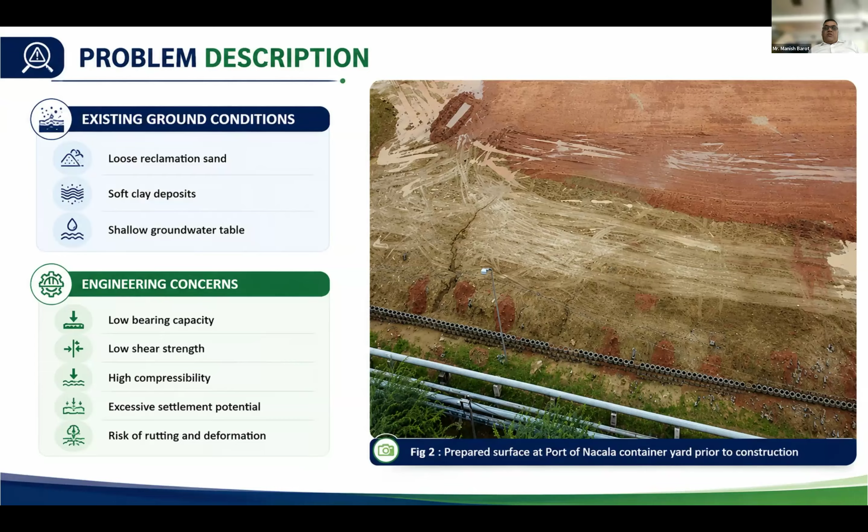As already discussed, the existing ground condition is very difficult, so either we have to go for replacement of soil or some deep foundation solution. We have various conventional solutions we could go for, but the area is around 65,000 square meters, so other solutions become costly. If we go for replacement, a large volume of good soil or good aggregate, whose availability is far from the site, will require more cost implication.

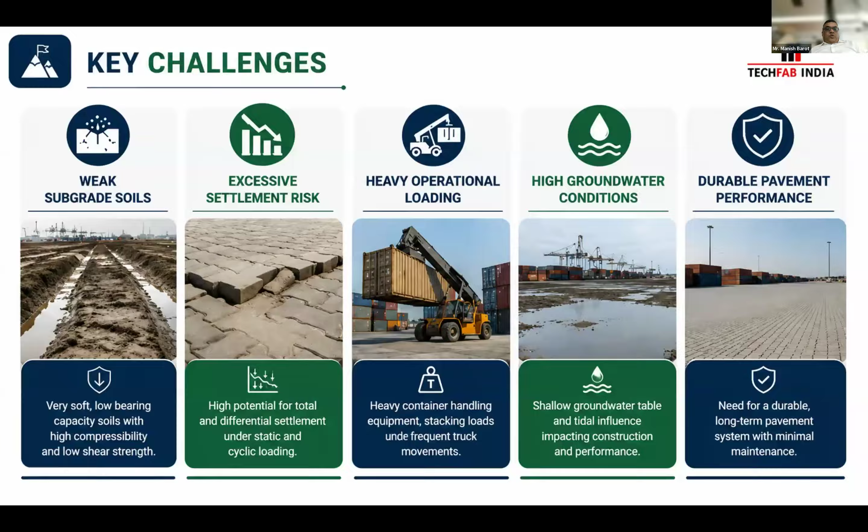So the key challenges here are weak subgrade soil, excessive settlement risk, heavy operational loading, high groundwater conditions, and the need for durable pavement performance. The conventional approach, as I already mentioned, is deep excavation, soil replacement, or thick granular layers. The drawbacks of the conventional solution are high cost, longer construction time, increased material consumption, and a larger environmental footprint. So a technically reliable and sustainable ground improvement solution is what we are looking for, and what the client is also looking for.

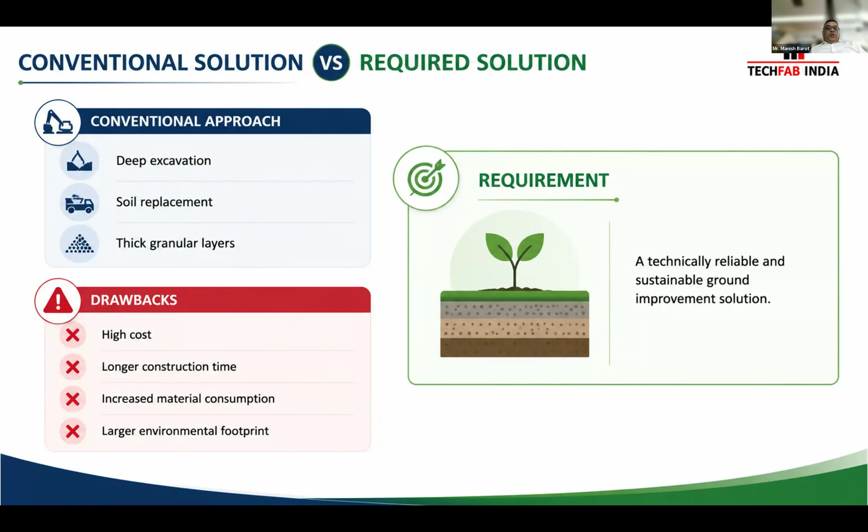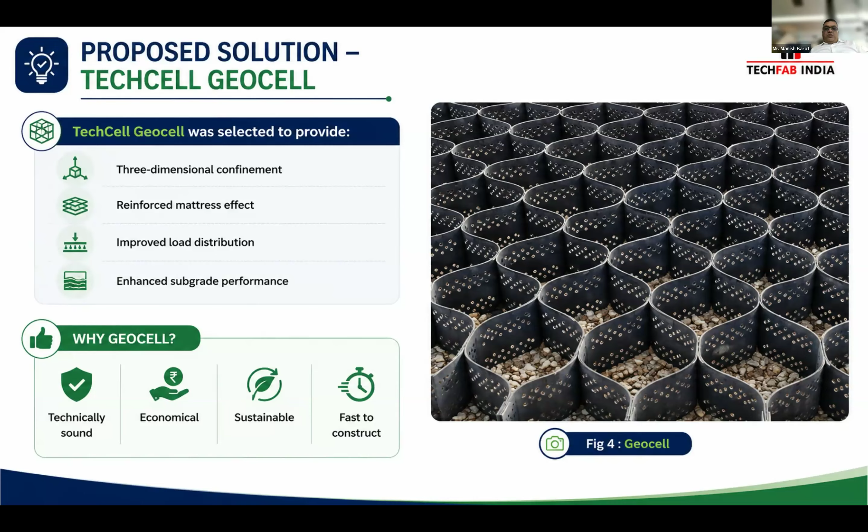So the geocell we have suggested is a three-dimensional confinement system, which will give the reinforced mattress effect, improve the load distribution in a larger area, and enhance the subgrade performance. So why geocell? It's technically sound and proven, and it is also economical compared to the conventional solution where a large volume of aggregate, deep excavation, or soil replacement should be used. It is a sustainable solution and very easy and fast to construct.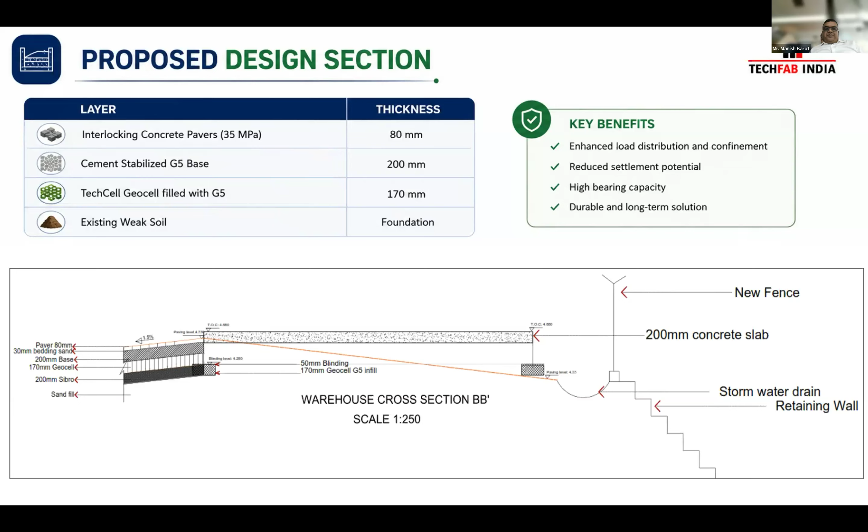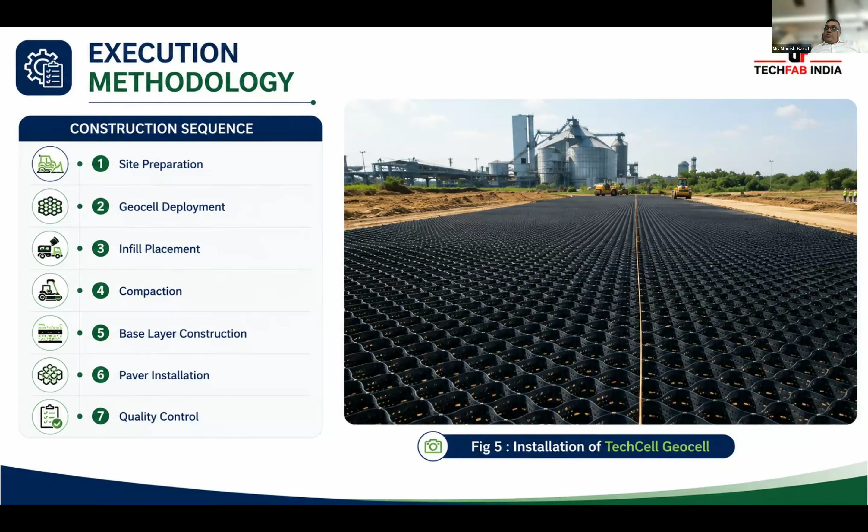So these are some of the photographs during the execution. It's a very large area of 65,000 square meters. We have tried to use the infill material from nearby sources, so it can give sustainability benefits.

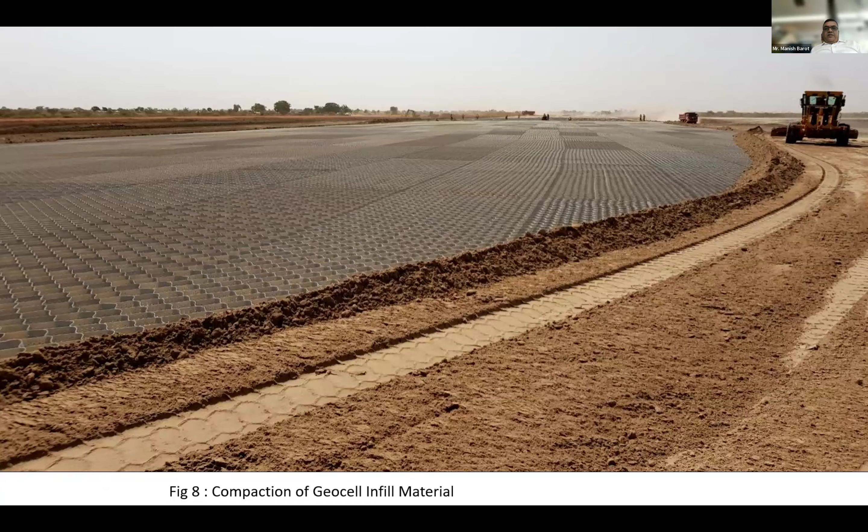So environmental and social benefits: again, reduced aggregate consumption with the geocell. If we are going without geocell, the thickness of the aggregate layer may come around 500 to 600 mm or more, but here we have achieved it with a 170 mm geocell fill. Also, as we are not going for any deep excavation and are laying directly on the existing soil, the excavation is reduced, and also the disposal of the same material. Then the transportation required is reduced, as this material requires less fuel use, reducing emissions from aggregate transport, and it contributes to significant CO2 reduction and climate responsibility.

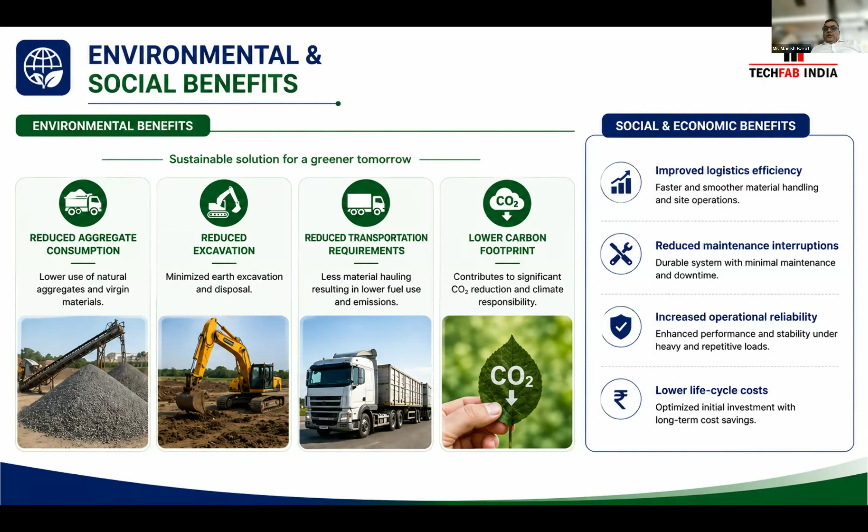So as per my calculation for a 25 year design life with a CBR of 3% for the project area, we are saving almost 41% of the aggregate. Then truck trips are reduced by 1706.

So indirect benefit of CO2 reduction for these trips is about 500 tons CO2. We cannot see the carbon— sorry Manish, we cannot see your screen now. It's dark. Okay, now can you see it? Now it's okay. Yes, fine, go to next. Okay, now it's okay.

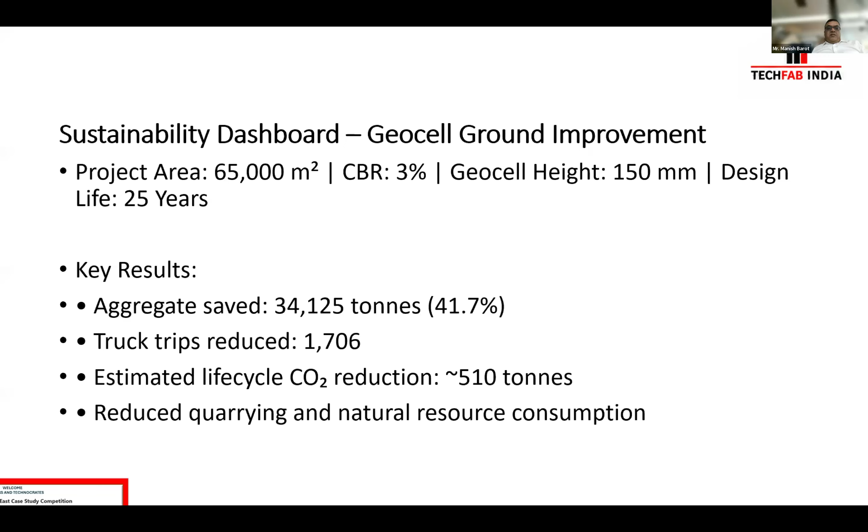As a sustainability dashboard, I have calculated some data. We have saved aggregate around 34,000 tons, which will reduce the trips by about 1700 tons, giving a direct CO2 reduction of 500 tons, and also reduced quarrying and natural resource consumption. So this is the sustainability dashboard.

So outcomes and conclusion: we have enhanced the bearing capacity required for this important port project, and completed the work in a very timely manner. We improved the load distribution, reduced settlement potential, and provided a heavy duty pavement application that is a cost-effective solution. The TechCell Geocell reinforced foundation system successfully transformed the weak coastal soil into a stable platform capable of supporting heavy port operations, demonstrating an innovative, sustainable, and technically robust solution for critical infrastructure development.

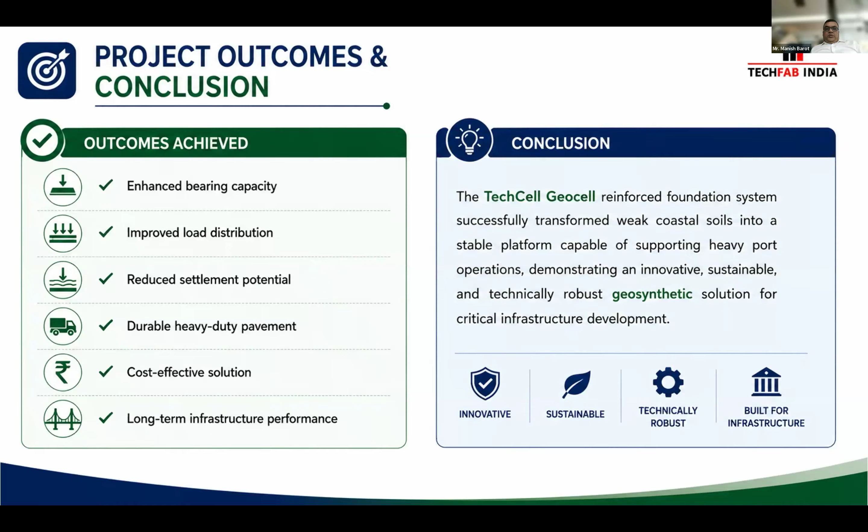So why is this project a benchmark for the Africa and Middle East region? This project demonstrates a proven, innovative, and sustainable ground improvement solution that delivers high performance in challenging ground conditions across the region. In coming days, other ports, logistic parks, container yards, industrial platforms, and warehouses can definitely go with this type of solution. So it's a smarter, greener, and stronger foundation for infrastructure development across Africa and Middle East. Thank you very much.

Thank you, Manish. Thanks for the nice presentation. Any questions? Mohammed, please.

Thank you for the presentation. I have a question. Did you do a loading test on the platform after construction? And if so, what was the settlement and how long was the test? Sir, actually no, we have not conducted that because we just handed over to the client after construction, and the consultant was a local consultant. We have not received any complaint about it, and we can do the analysis, but as per our calculation, the settlement is under control, and we have not tested afterwards. Yes, but what is the expected settlement based on the design calculations, considering the long-term settlement of the deep or soft clay deposit underneath the sand? Actually, the long-term settlement is in the range of below 100 mm.

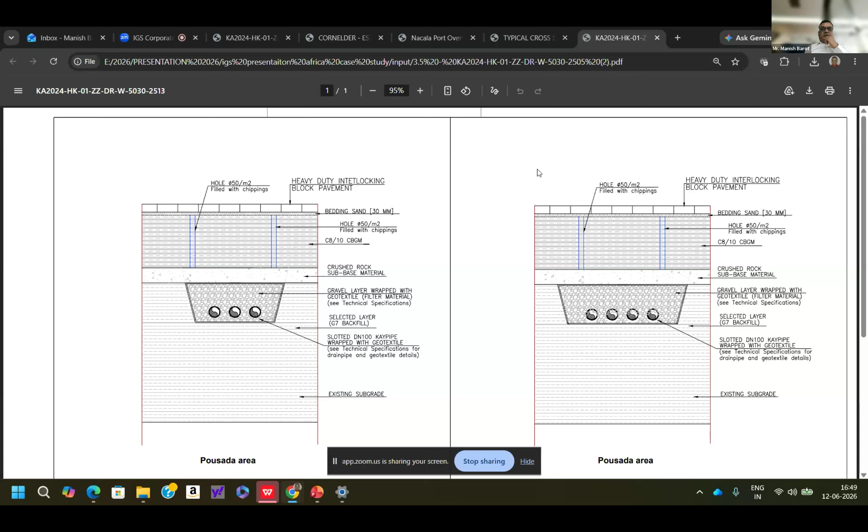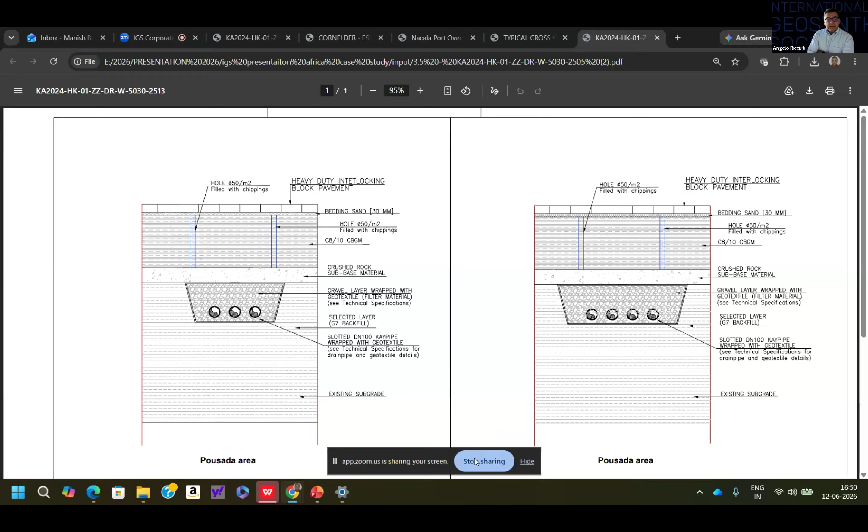So we have seen geosynthetic solutions mostly with MSE applications. This one was for ground improvement. We're used to seeing geogrids for this kind of application, but this is the typical case where, when good soil aggregate is not available, geocells can become the solution to provide a performing solution where there is poor soil with very low bearing capacity. The common benefit we see across all applications is this. Can you see the screen? Yes, now. So we have also given the subsurface drain, there's a geocell, and below that crushed rock sub-base material, and below that a gravel layer wrapped with geotextile. I think that's okay. So as we've seen, all these geosynthetics in different applications ultimately provide innovative, sustainable, and cost-effective solutions.

Thanks to everybody for giving your presentations, and to the attendees. Now the procedure is that the judges will hold a separate meeting to decide who will be the winner and who will participate in the final in Montreal next September. In the meantime, the organizer of IGS Africa will give a presentation about the next conference in Africa.

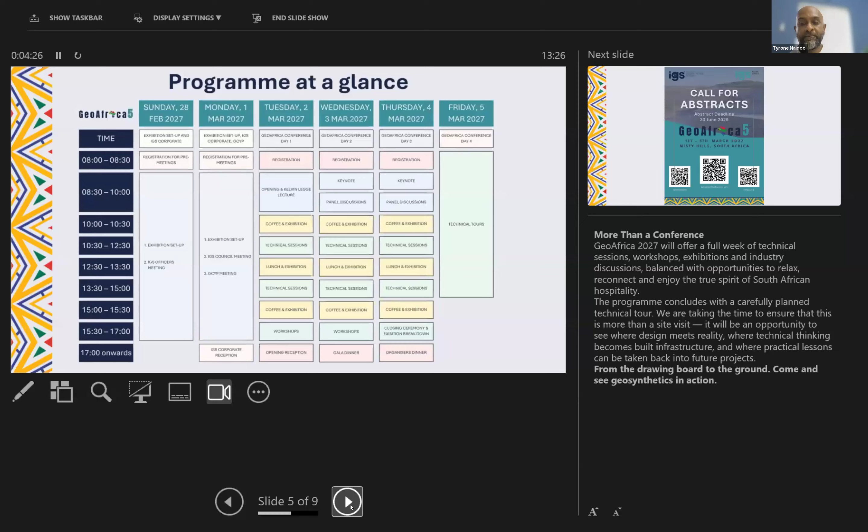The call for abstracts for GeoAfrica 2027 is open, but the clock is kind of ticking. Abstract submissions close on the 30th of June 2026, so now is the time to share your research, case study, or practical experience with the geosynthetics community. There may be an extension - conferences seem to enjoy deadline extensions almost as much as contractors enjoy variation orders. But please do not treat this as a confirm. Start writing, submit early, and save the last-minute panic for absolutely something else.